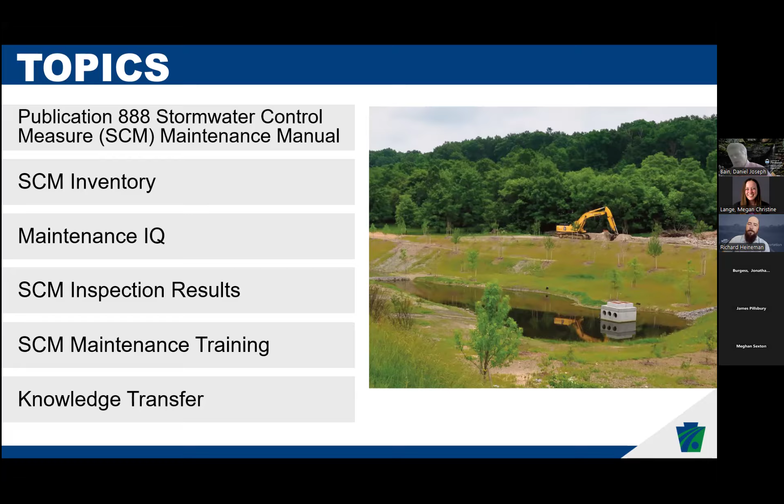So the first thing we started with when I kind of took over the stormwater control measure maintenance program, we have a maintenance manual. Even though it is a maintenance manual, we kind of cover everything in there. We have other manuals, design manuals that tell our designers how to design to meet the permit limits. But even those designers still look at this Pub 888 to kind of see how things should be maintained, how they're going to be maintained so they can design those SCMs properly.

We cover everything from inventorying to our inspections. There's different types of inspections, the maintenance, how to perform maintenance on them. There's common components, how folks schedule and charge those when they're going out doing that maintenance work.

Our SCM inventory, we really didn't have a centralized one here till 2015. If I needed to know information about an SCM or how things were designed, we'd run out to our districts. They had like paper files in a tin shed somewhere. So it was kind of hard for us to get a good understanding of what was going on out in the field.

So we took a major effort here in central office. We actually went through 500 different projects, extracted all that information from the plans, and started creating our inventory. So it took us a little bit to get there, but right now I say our inventory is pretty accurate and rock solid, and we have lots of information in there, which helps us in the long run.

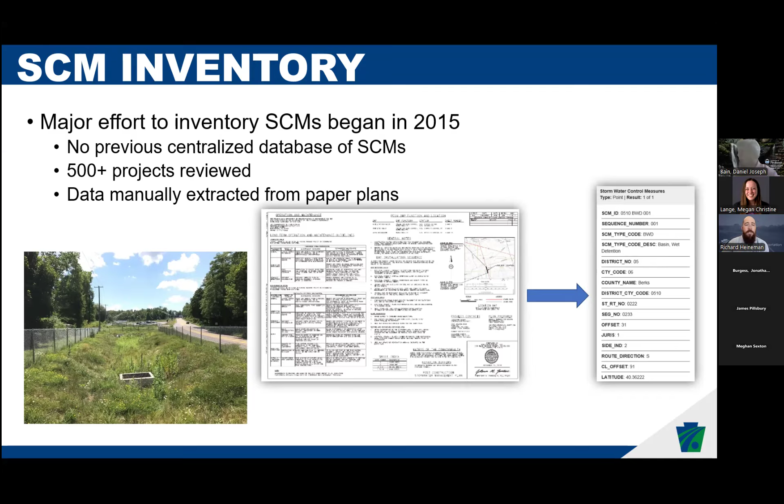In that inventory, it's basically all of our department-owned SCMs. We do sometimes add non-department-owned SCMs if they're right along the roadway, and we get lots of questions like who owns that. Sometimes we'll add them in, but it's just the ones that PennDOT owns and operates and maintains.

We have like 40 plus data fields. Pretty much any data that's associated with that SCM, we capture and keep it in our files in case anyone asks us a question down the road, like how it was designed, what's the drainage area to that, anything that's in that permitting design side. We in maintenance take that and keep that for the life of that SCM.

We in central office review all new stormwater control measures and all that data. So districts will send us that information, and there's about four of us here that review all that data to make sure it's accurate, it makes sense, it's the right type of SCM. We store all those documents associated with those SCMs, all the as-builts, the plans, the permitting, kind of everything in one-stop shop for anyone that needs to know information about that.

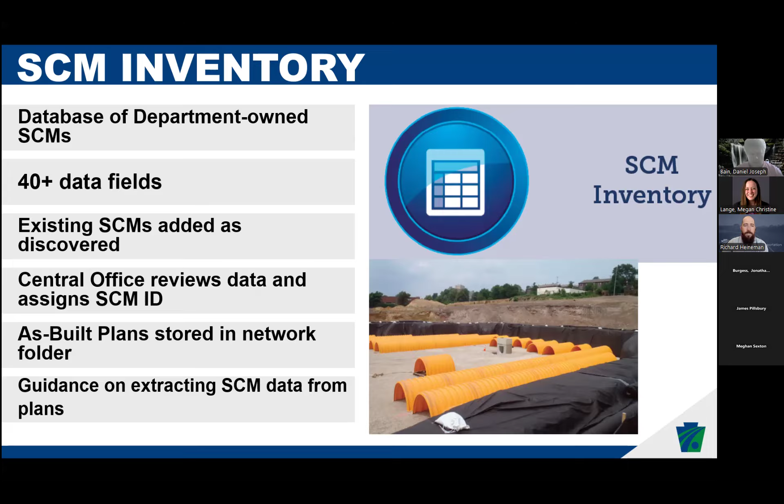So I like to point out here, PennDOT, I always like to tell people we're probably number one, we have the most SCMs in Pennsylvania. Right now, we're up to 4,500 SCMs that PennDOT's responsible for across the state. So we have a lot to do and a lot to maintain, which is good.

We get a lot of data from that, seeing what issues we're seeing after construction, things we have to tweak in design, long-term O&M issues that we see. So we have a pretty big sample size, which helps me look at that, but it's a lot of work for our crews and districts to maintain them.

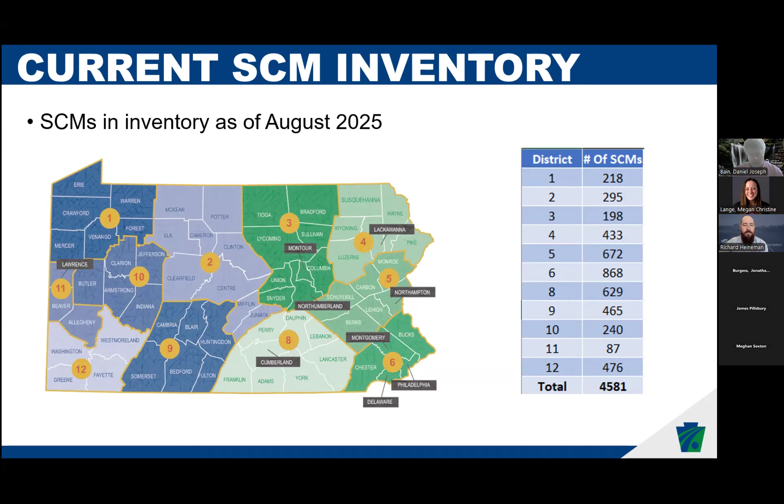I will tell you our SCM growth is tied to our department's program, meaning if we get a lot of money and we're building a lot of new roadways, we get a lot more stormwater control measures added to that inventory.

And like I said, these first couple slides, I'm just trying to give everyone a background where we're at in PennDOT, but our centralized database, we store all that information in what we call our Maintenance IQ. It's a custom GIS application for PennDOT, which houses all that. Anyone in PennDOT can see that information. They just have to click on that dot. It gives you anything you need to know about that. It has inventory data, inspection data, all of that information.

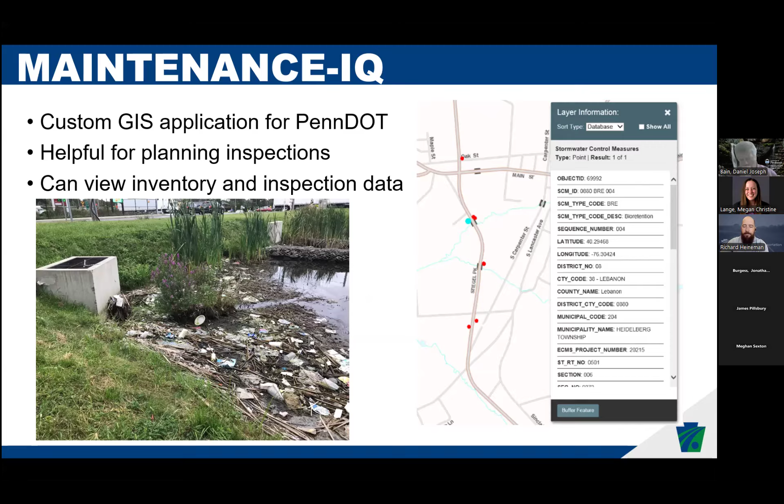So to get all that information, we have two different types of inspections that we do here at PennDOT. So on a 3-year cycle, we do visual screening inspections. To do those inspections, we require folks to take a 1.5-day training. It's required to do those.

It's a lot of information, but I always tell folks the VSI, you really don't even need a plan to go out and do that to inspect those. We're looking to make sure it's still functioning, like we don't have a lot of erosion, too much vegetation, structural issues. It's just that high level inspection that we do once every 3 years.

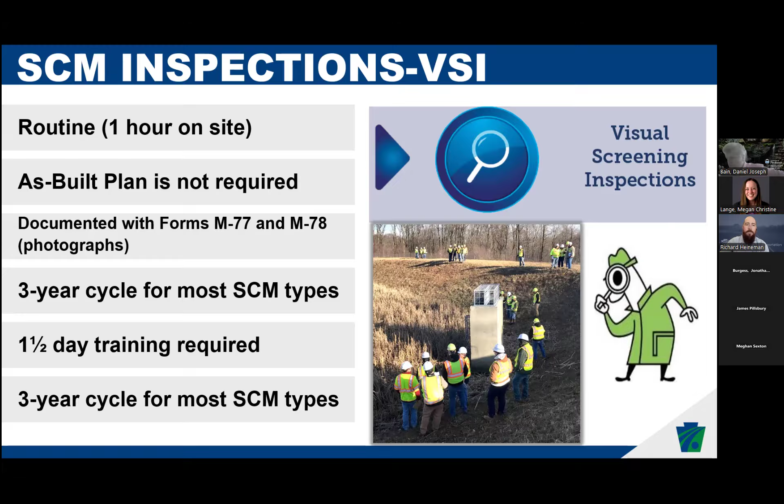The other inspection we do is a condition assessment. We do that 1 year after construction. The reason is we feel that an SCM 1 year after construction is pretty much settled in. We're not going to see a lot more issues. And then every 10 years after that, typically that's an engineer or environmental professional doing that analysis.

It's very detailed, it's like 2 to 4 hours on site, depending on the size. They're confirming that it's still built per the as-built plan. It's still functioning properly. That also requires a 1.5-day training, so those folks have to go through that to do those inspections.

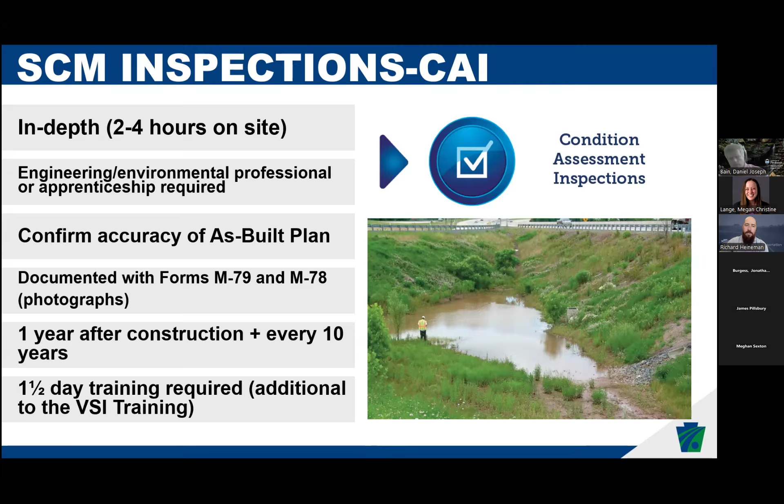So kind of getting to now what Dan said I was going to talk about, to understand what we need to look at in design and change some of those designs. We took a lot of that inspection data, seeing some of those issues we have. So we have SCMs that have been out there 10 to 15 years. We have ones that have been out there 2 years. So we looked at over 5,600 different visual screening inspections.

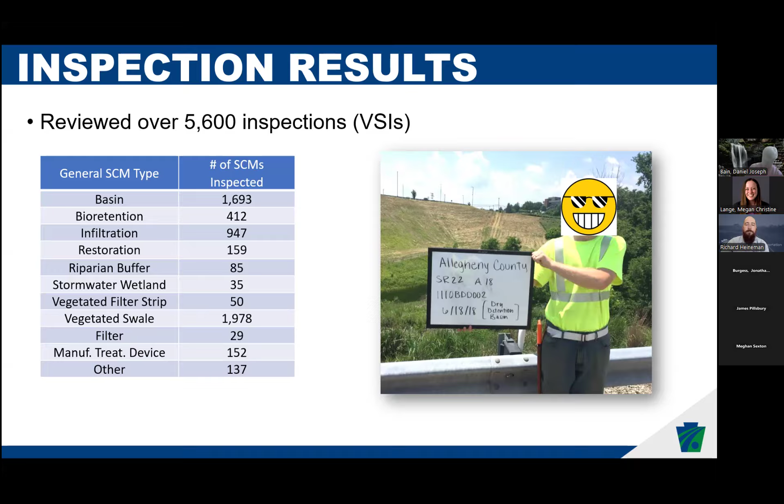So to tie that into design, when we talk to folks when we're doing design, whether it's a forebay or some way to start, I don't want to say capturing the trash and debris, but limiting the area of that trash and debris that goes throughout the SCM. So when our crews go out there and have to pick up that trash, they're not having to go through this large SCM where it's spread out evenly. So some of those forebay designs come into play. I have some slides and examples later on.

Erosion, we see a lot of. So that SCM bottom and side slopes, we see a lot of side slopes where we'll see erosion. So making sure when we're looking at that design, not having those side slopes so steep, trying to tuck them in there, or making sure we have the right vegetation, or if we have to, does it have to be rocked or riprapped, so we don't see that accelerated erosion. So trying to focus on that in the designs, so then our crews later on don't have to go back and fix that 2 to 3 years after it's been up and running.

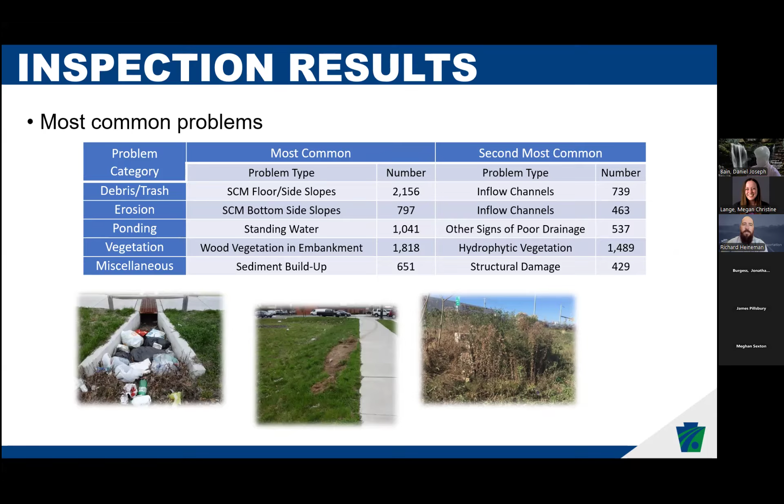I don't have all the answers to that, but we're trying to look at that. If it's just barely infiltrating into design parameters when you're looking at it, it's probably not going to get any better 2 to 3 years later on. So those are the big ones; we took these inspection results and looked at that overall, looking at the different types of SCMs. So I just lump basins all together.

We see every type of problem category across, but the most engineering evaluations that we had to do is standing water in dry basins. So we have to go back and look. It was like 240 some basins that aren't supposed to have standing water, but they do now. So that's probably going to change. So some of the things we're looking at, and some of this is a regulatory driver, is during construction now, DEP is going to start requiring confirmation infiltration testing.

So after December 8th of this year, in our construction projects and all projects, if you're saying it's supposed to infiltrate, we're going to be checking that infiltration rate after it's completed in construction before we hand it over to maintenance.

The other thing too, in our bioretention, looking at that right type of vegetation, what are we putting out there? Is it easy for us to maintain? Do we mow it? Do we not mow it? Can we get into that? I have some slides later on to talk about specific examples of that.

And then, like I said earlier, infiltration—you probably hear me say this a lot. That's kind of where we see the most issues, putting infiltration basins where that infiltration was probably right at that limit or level to meet the DEP requirements for an infiltration basin.

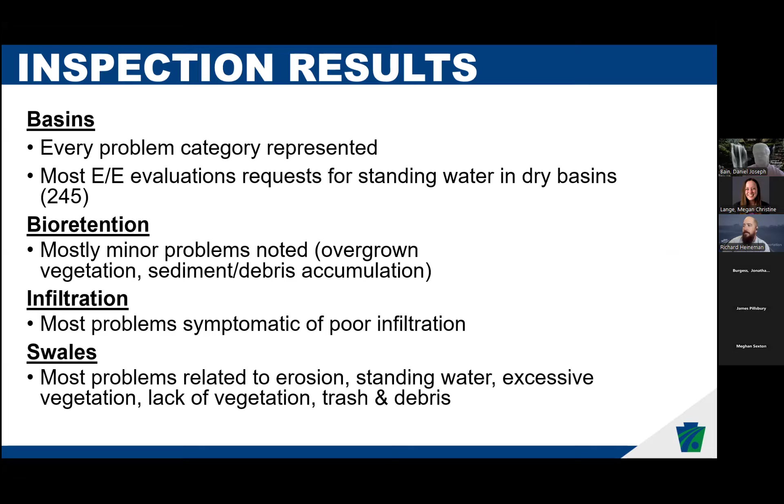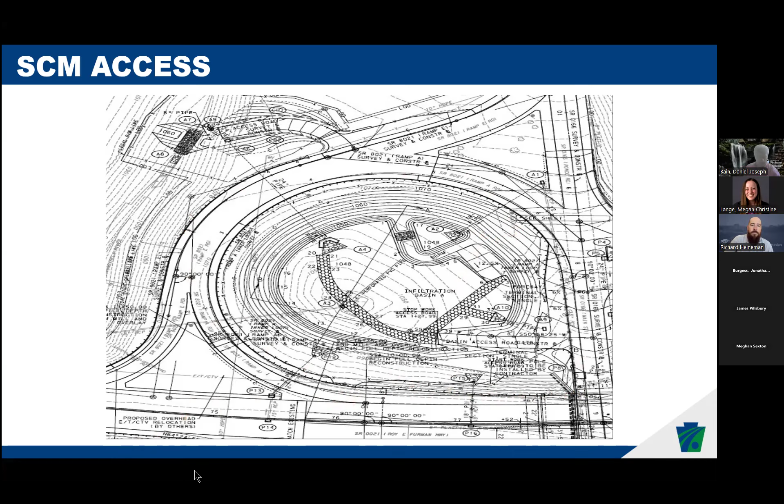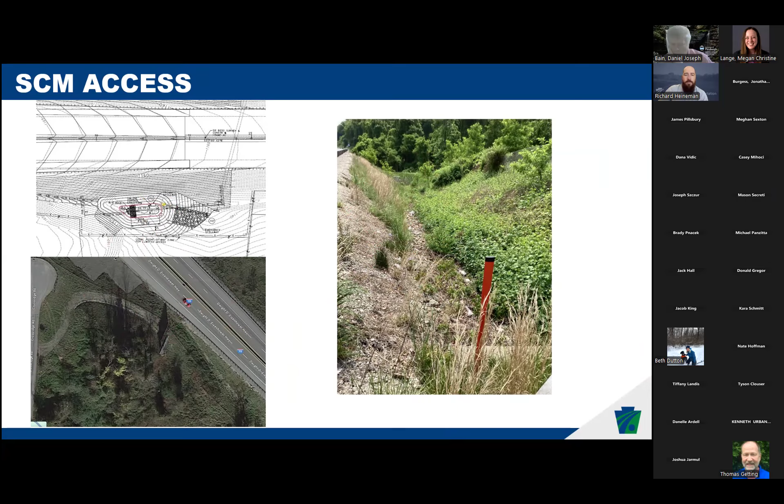So it's just one of the things we've had issues with—getting into our SCMs is a big thing. And this is another one, and I've taken these from different districts. A lot has to do with access roads.

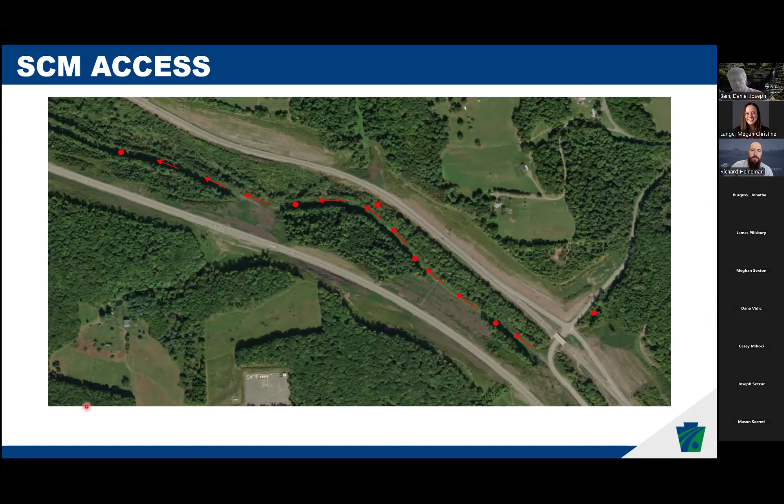And that can get costly depending on what type of soil mixture is needed to promote that infiltration. So it's kind of a larger issue we're trying to figure out.

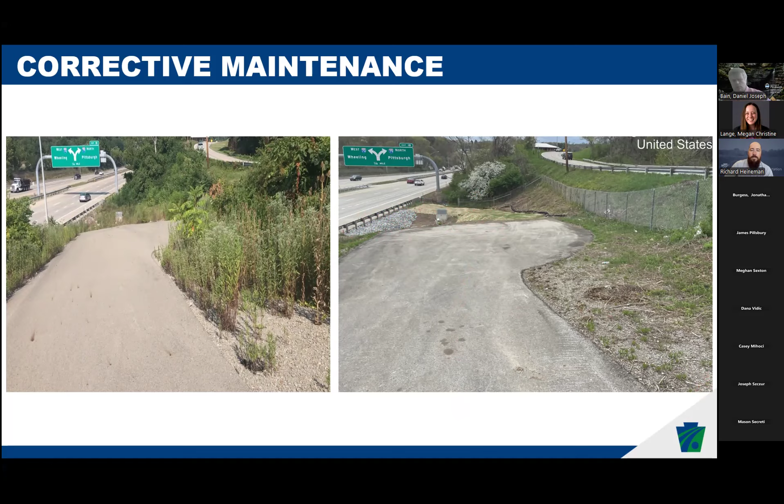And this is just a similar picture of that same basin before - the pre and post of that same basin I was talking about prior.

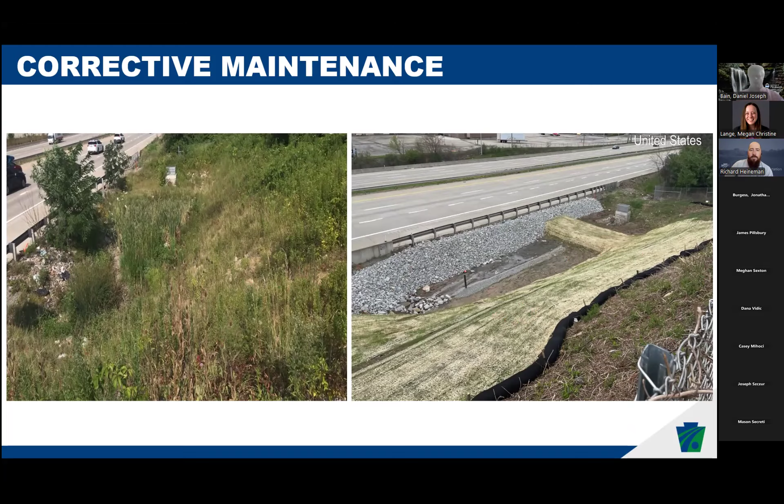Here's another one where we had to do a lot - it was supposed to be a dry detention basin. Pictures to the left. You can see here it was holding water.

We did another large corrective maintenance project. We built it back to per plans. The contractor did take care of our vegetation there, replaced that filter strip here in the middle, and installed an under drain to help with that infiltration.

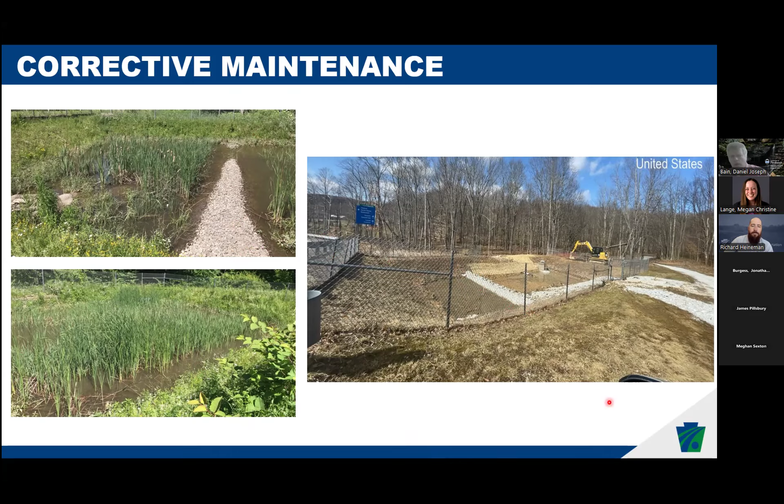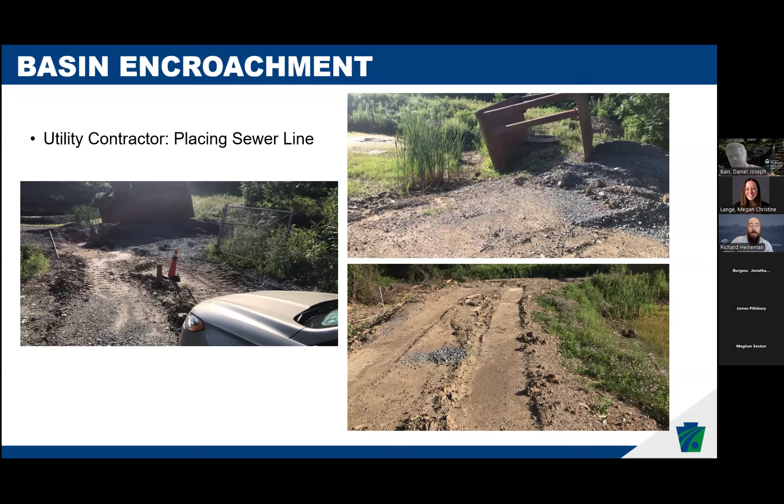I just put this one in - it's not always construction projects. We actually had a project where we had an existing SCM where a sewer contractor went through and plowed through our SCM, so we had to have them rebuild it. I'd like to point this out, even though they're built and already there, keeping that inspection cycle is important because they just didn't think they had to worry about it, so they went through and destroyed our whole SCM. We made the contractor put it back to acceptable condition, but it's just a shock thing you don't always think about - having to worry about utilities going through existing SCMs.

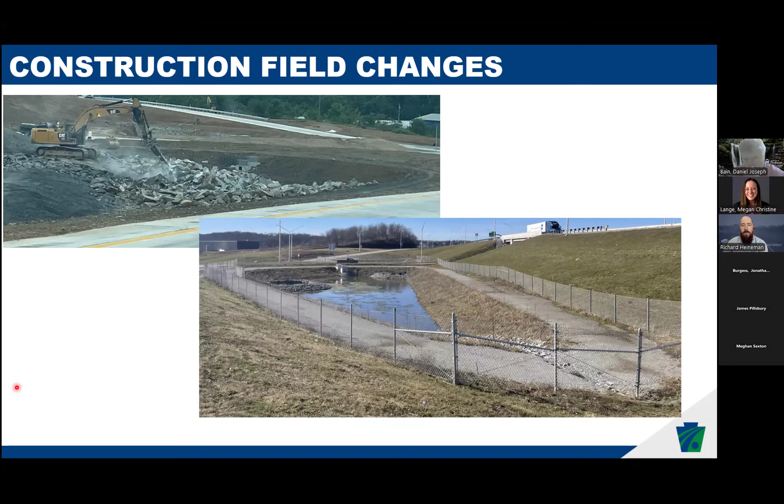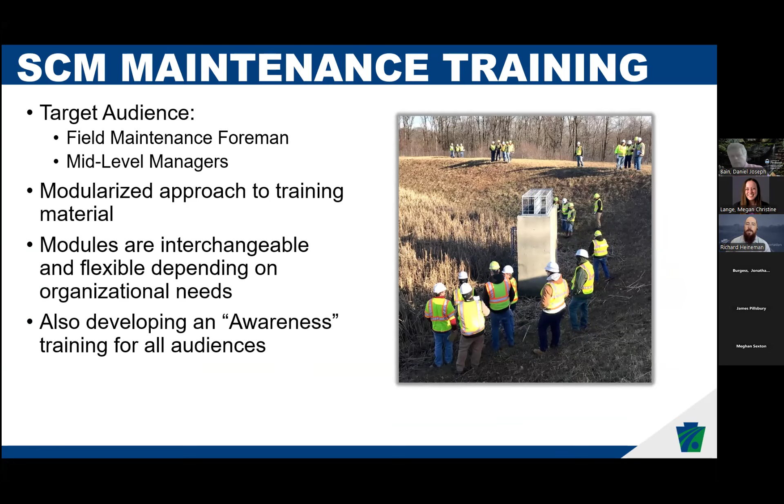So that's kind of all my design construction issues. I do want to tie into our SCM maintenance, which our crews out in the field - we have over, I think, 7,000 employees at PennDOT on maintenance crews. Training them to know what to look for and how to maintain the SCMs helps us because they have a lot more eyes out there. If they see something wrong, they can bring it to our attention and we can fix that. This is just my plug.

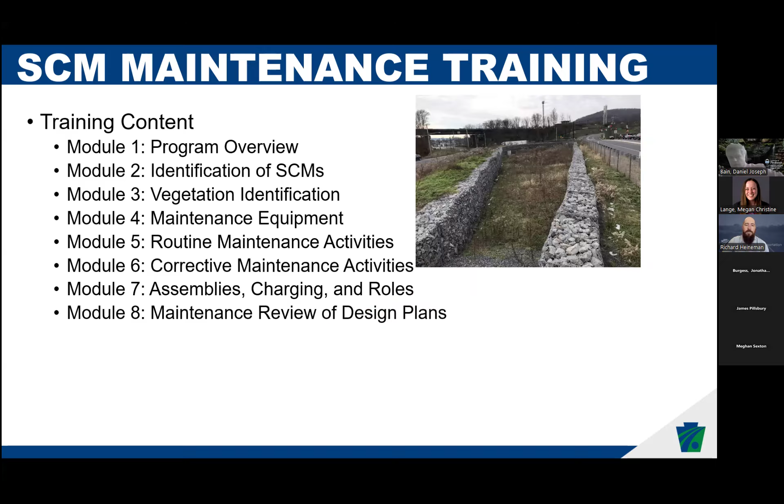Our maintenance training is 8 modules. We tell all of our maintenance folks how to identify SCMs, type of equipment, how to do the routine maintenance activities. And then that knowledge transfer is kind of key.

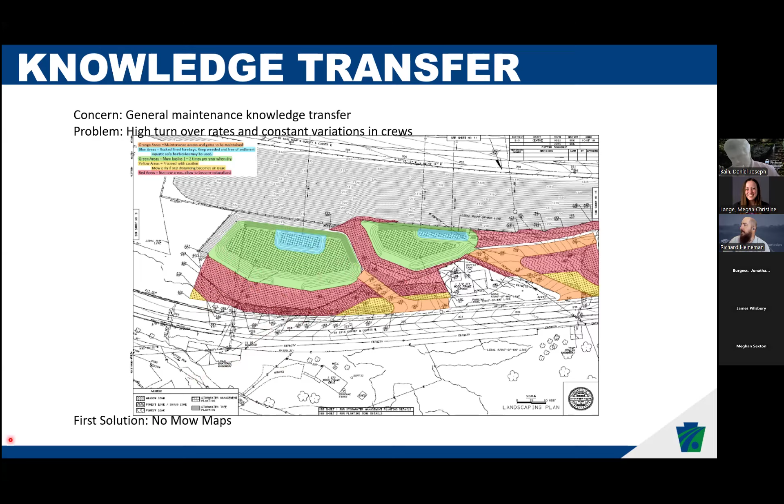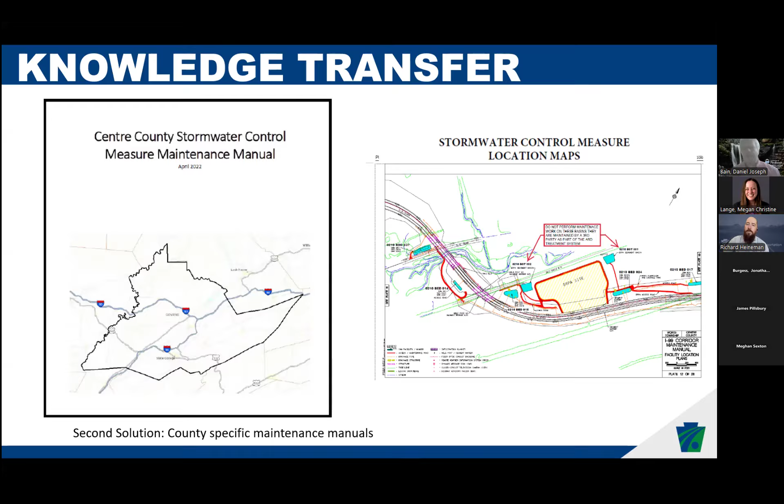So that kind of wraps everything up on my end for my presentation.

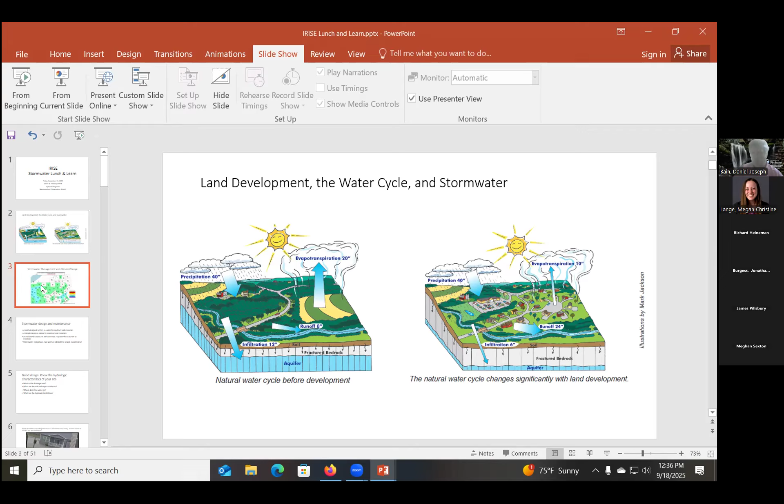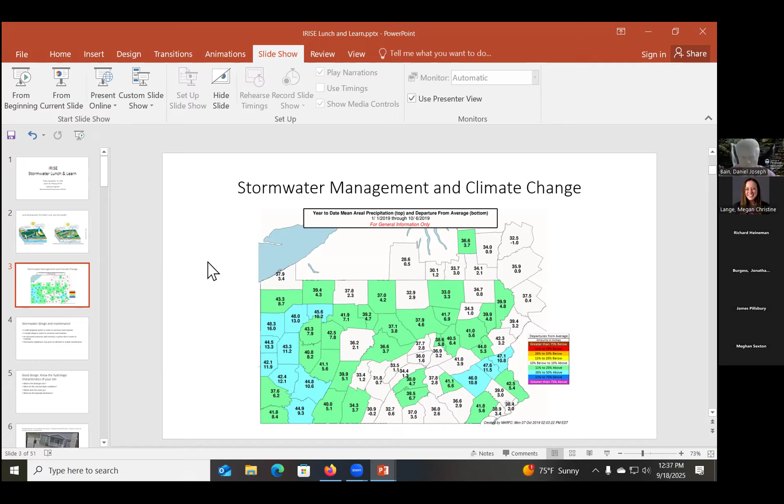This map here, can folks see this map of the state? This map shows from a couple of years ago when we had excessive rain. In southwestern Pennsylvania, the Corps of Engineers has said that in the Ohio River Basin, they expect over the next 50 years that rainfall will increase and the intensity of rainfall will increase. So as you design for maintenance, you have to design stormwater to handle a larger, faster storm than what has happened previously.

You have to step back from your design. You have to look at that design and say, okay, is there a way I can make this simpler? Is there a way that I can make this easier? Because maintenance is not being done by the engineer who designed it. It's being done by someone else, and the person who's doing it may not understand all of the aspects of stormwater management very well.

So, well-designed system, a simple design. Engineers especially—when I was in college years ago, I had all kinds of classes, but I never had a class on how to run a bulldozer. So you get an engineer who designs a ditch that's supposed to be 1.327 feet deep, and the guy in the field is building this ditch with a 30-ton machine with a blade 10 feet wide.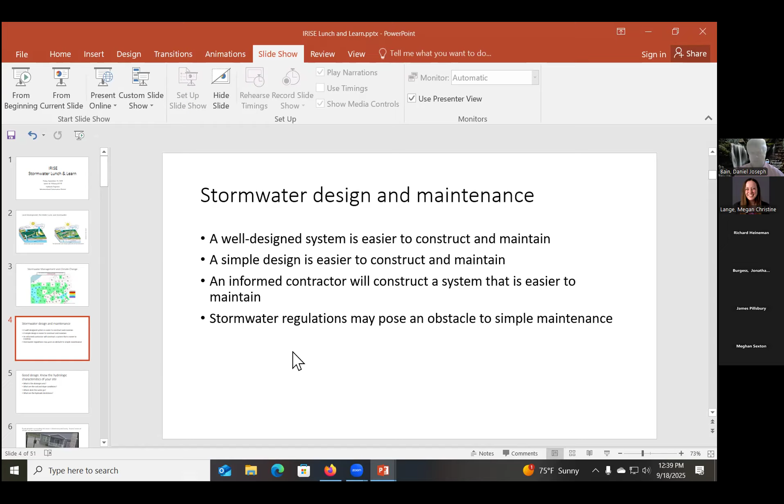Then, of course, the last bullet point here is on regulations. We deal a lot with DEP, the Department of Environmental Protection, and stormwater regulations. We'll talk more about that later, but some of the regulations may pose an obstacle to maintenance.

So this slide here: know the hydrologic characteristics of your site. What is the drainage area? What are the soil and slope characteristics? Where does the water go?

One of the slides that Rich showed was busting out rock to build a detention pond. Perhaps someone didn't have access to borings or testing, and they thought, well, put this pond here and it will infiltrate. But if they would have had some tests available to them, they would have had a different situation.

This is a house that we looked at. This is not a highway project—this is about a $350,000 house in a municipality in our county. Earlier this year, we had some very heavy rainstorms come through that produced quite a bit of rain in a very short time, in a very narrow band, maybe 4 or 5 inches of rain in just a few hours, but in a very, very narrow band.

This house here was surrounded on 2 sides by several inches, almost a foot of water. If we look at the next picture, we will see the water came up against the foundation of the house. They built the house fairly well—it had excellent foundation drainage. That excellent foundation drainage carried that water, which was several inches deep, down along the foundation.

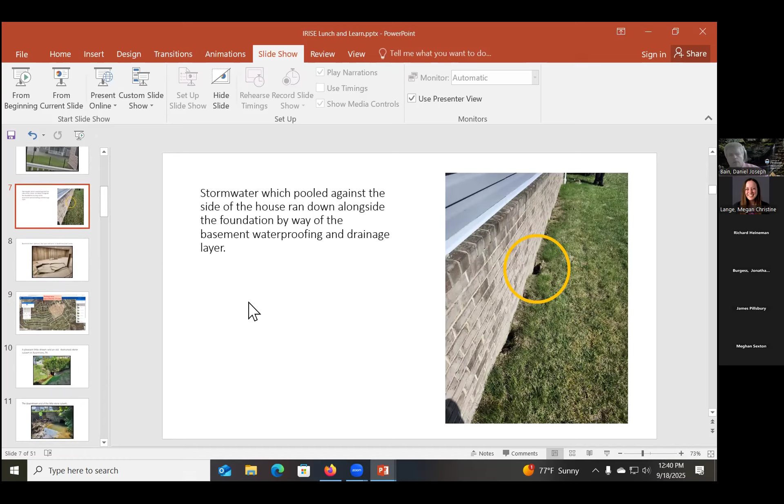So the water then was introduced under the basement floor, and this was the result: a house that was only 4 years old had well over $100,000 of damage because of this water coming up against the side of the house. Why did the water come up against the side of the house?

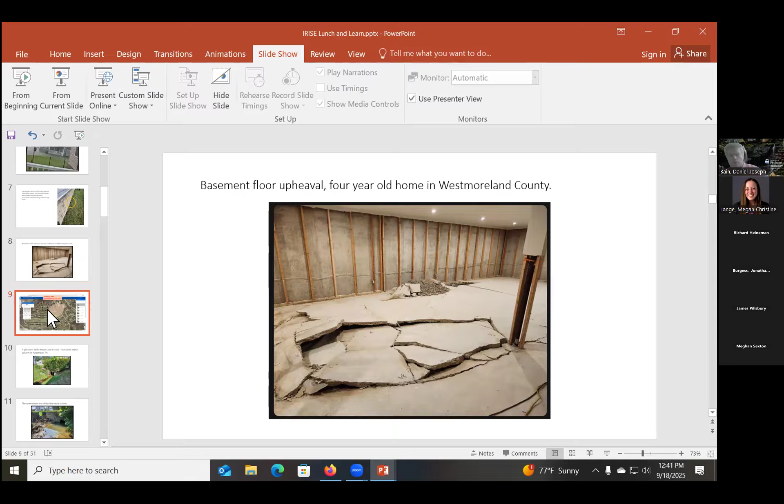Well, we went out and looked. We looked at our county's tax map system—if you have a tax mapping system in your county, make use of it. Ours has contours available, and ours has all sorts of things.

Well, the drainage area in that storm of water running to that house was 23 acres of land. So if you got 4 inches of water over 23 acres of land in the period of an hour or two, no wonder the house had this damage. And so the person who designed the house obviously wasn't paying attention to what was going on around the side of the house, and that happens with stormwater management as well.

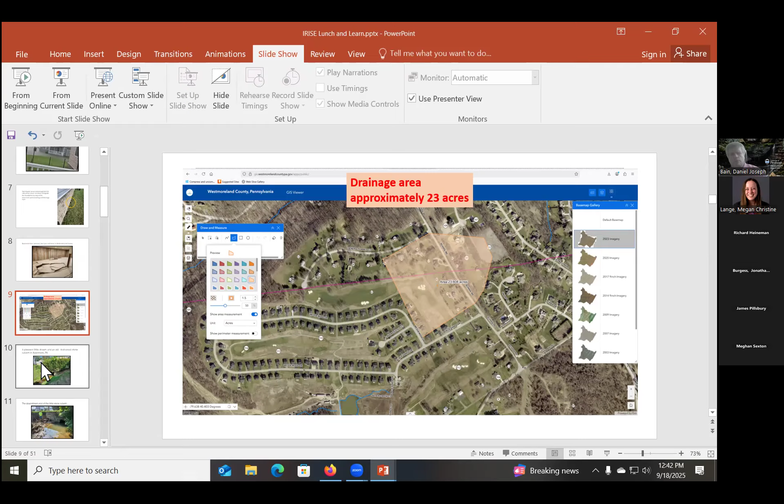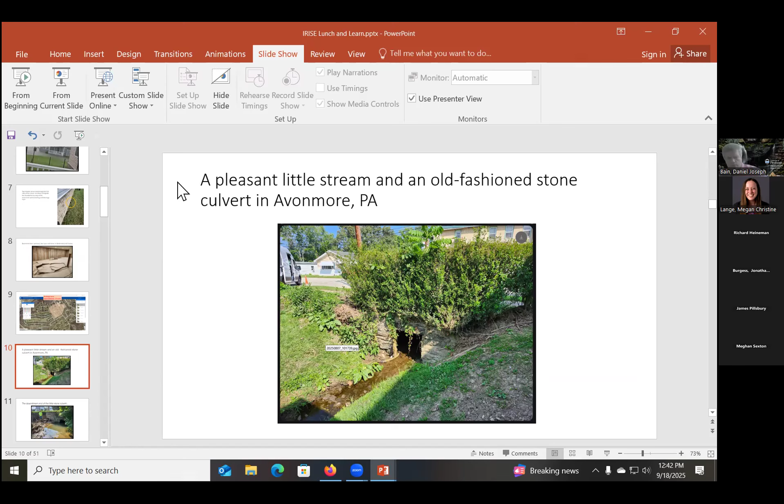Here's a culvert in the little town of Avonmore. Now, Avonmore is one of those places where the mill has closed and everything's kind of trickling away in a sense. So here you have this cute little culvert, maybe 3 feet square or so, maybe slightly larger. And so this is the downstream end of the culvert.

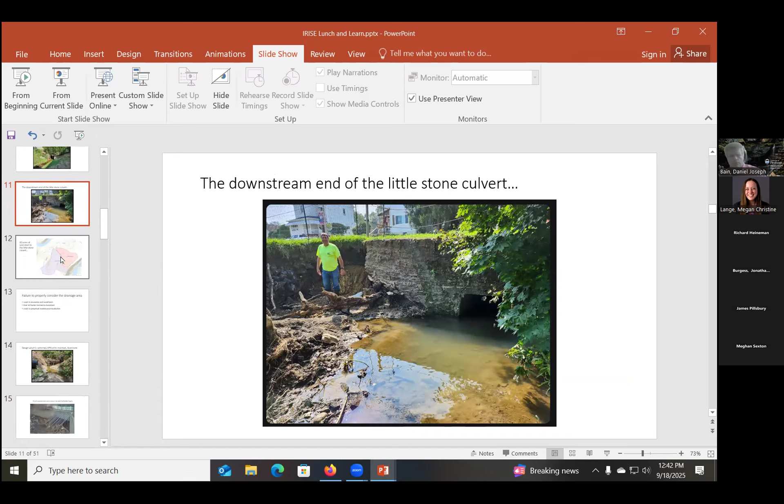They had several inches of rain. It was the same storm. And that storm dropped several inches of rain, and so the water couldn't go through the culvert. Culvert was too small. Water came pouring over the top. And once again, whoever designed that culvert, and the thing's probably 100 years old, there's 90 acres of drainage tributary to that culvert. And so really, when we think of maintenance, we've got to look around.

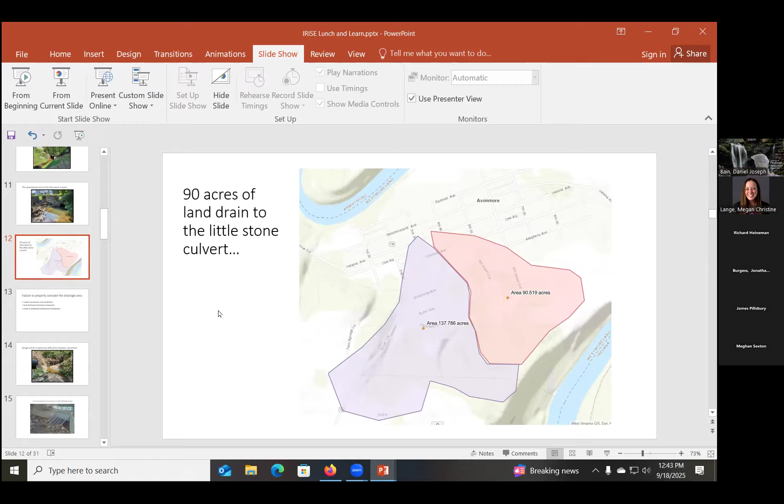You have to stand where you're at and look around. Are there houses? Are there trees? Is there a farm field? Is there a shopping center? What's going on around me? And so that's very, very important.

There were 30 houses in Avonmore that had damage, water in the basements of 30 different homes. These are people who do not have much money. They are people who have lived in the house maybe a long, long time, and maybe they're on a pension or fixed income or something. And so the failure to consider what was around led to that.

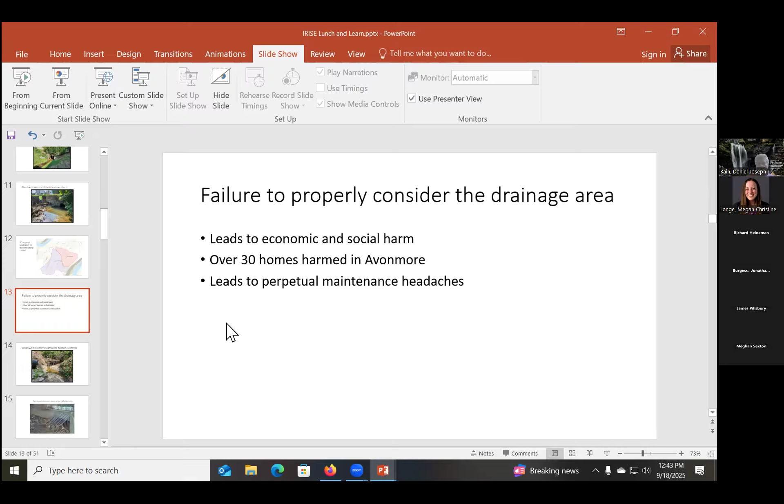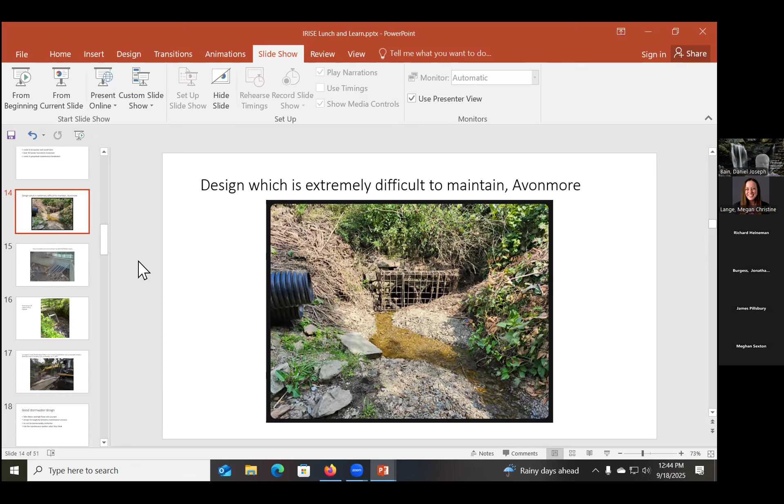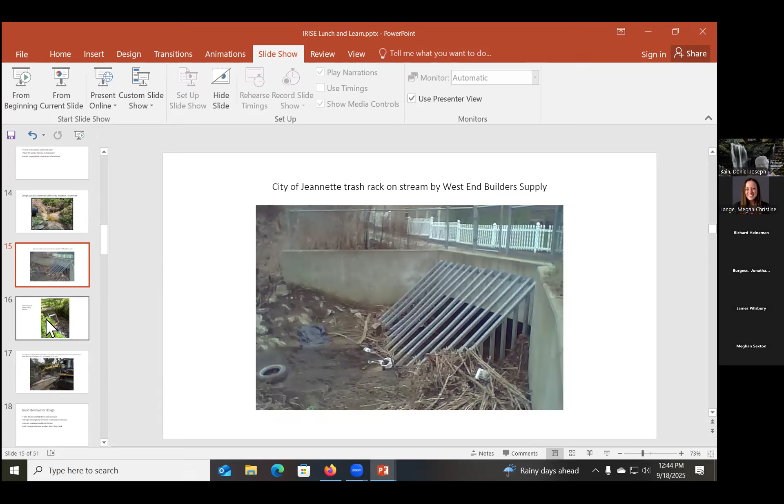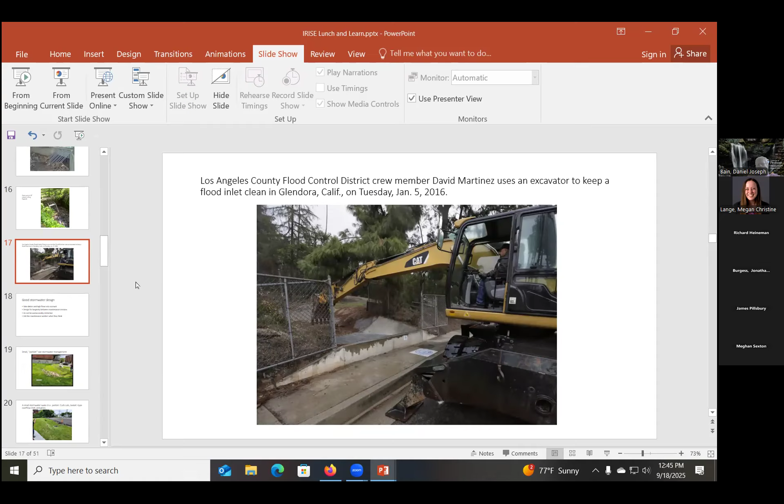Okay, so this is where you want to communicate with the equipment operators, communicate with the people who are in charge of the maintenance. And sometimes I think that's probably the weak link in this chain, is that someone doesn't communicate with the person who's doing the maintenance.

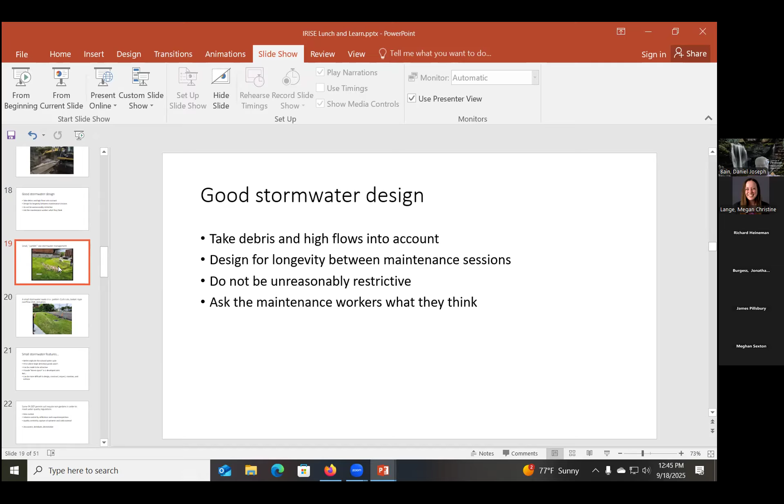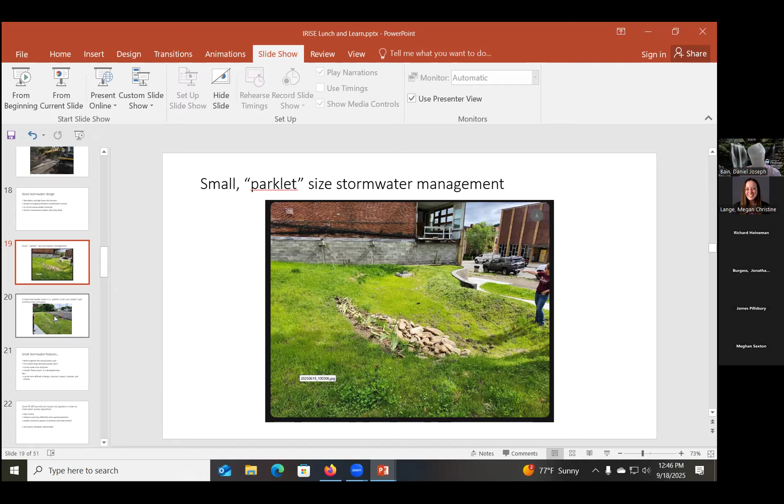Now, small stormwater features are really something that DEP is looking at, and they want municipalities, they want developers, they want landowners to do this. Small features replicate the water cycle better. You try to spread that out. Small features will fit in. In an urban area, they provide a little oasis, a green area, but they'll add a level of difficulty.

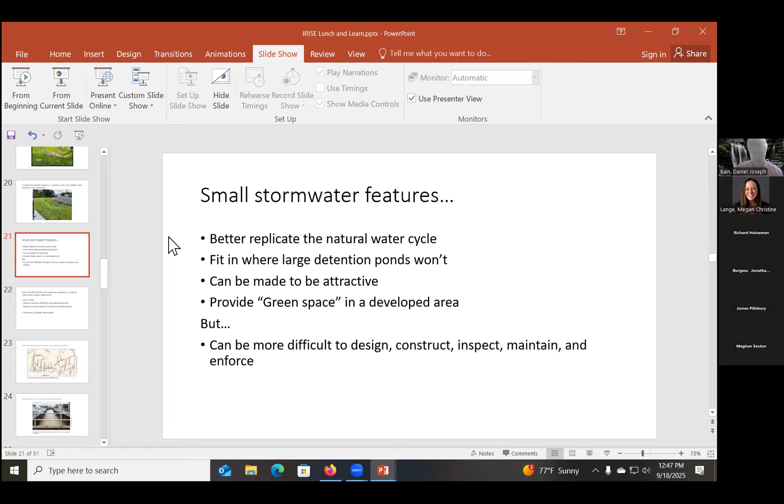And speaking as somebody who's been to lots of sites over the years, it's far easier to inspect one detention pond than 10 rain gardens. And so you have this battle back and forth. What are you going to do for stormwater management? Now, DEP likes you to think about these three things: rate control, volume control, and water quality.

And so Rich had a photo there of all kinds of trash building up in a detention basin, and that is sure a problem. And now we think about microplastics. When plastic trash gets into the system, it breaks down, of course. And so we need to try to trap that. We need to try to capture that. And the words that DEP likes to use: disconnect, distribute, and decentralize. And so that is something that they look at.

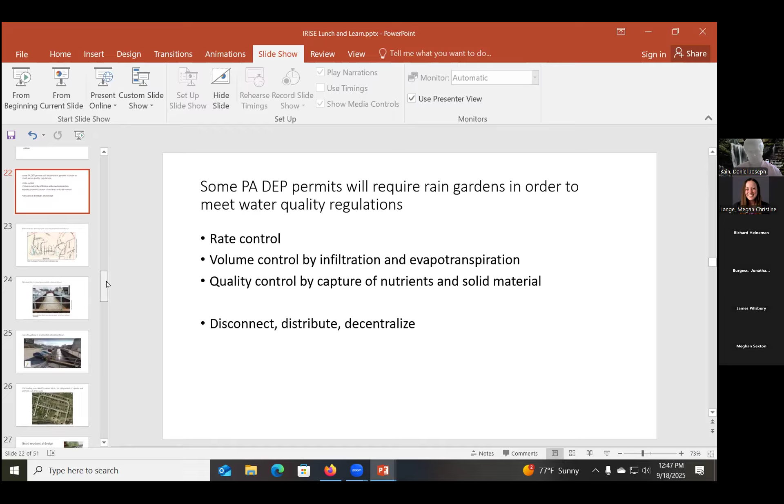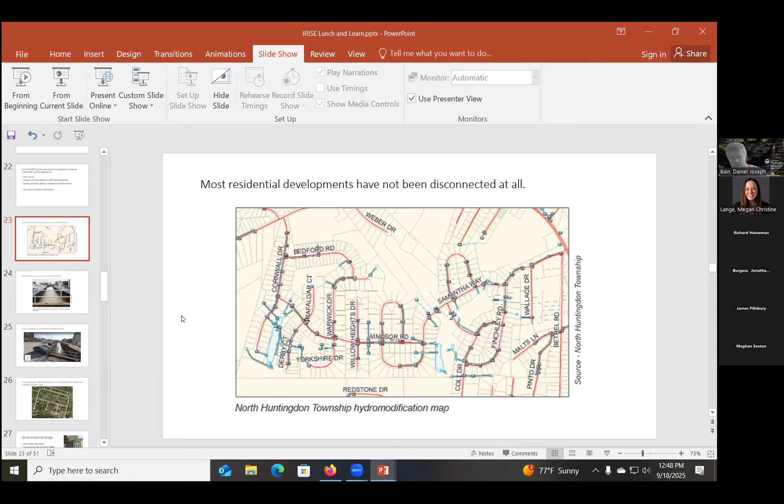Water falls on the roof of a house. It runs down the roof to the gutter, down the gutter to the downspout, down the downspout onto the driveway. The water goes on the driveway into the street. It runs down the street into the catch basin. It runs through a pipe, and it never has an opportunity to be interrupted or delayed or stopped in some way. And so that is a problem of some land development, that there is this connection and the water is never disconnected.

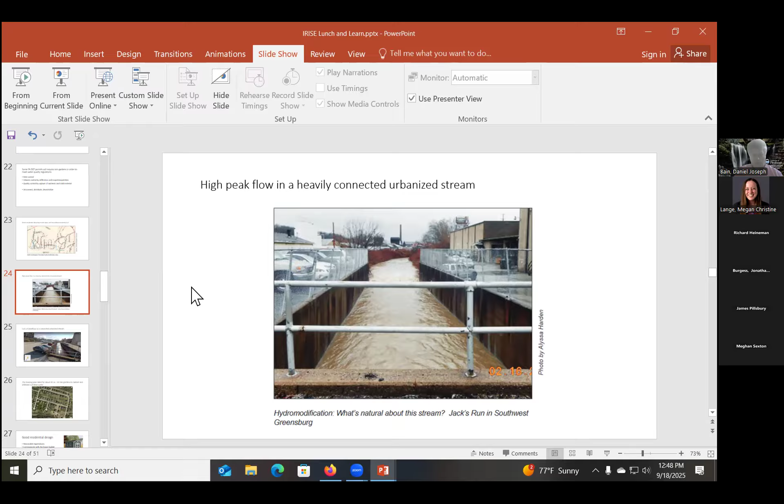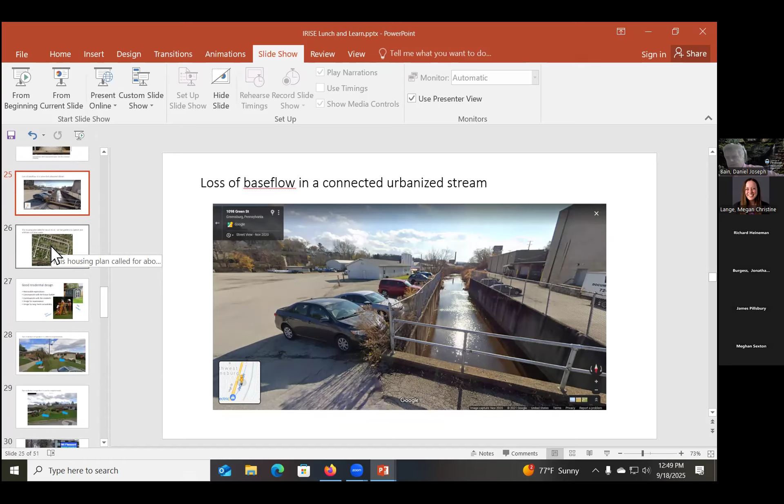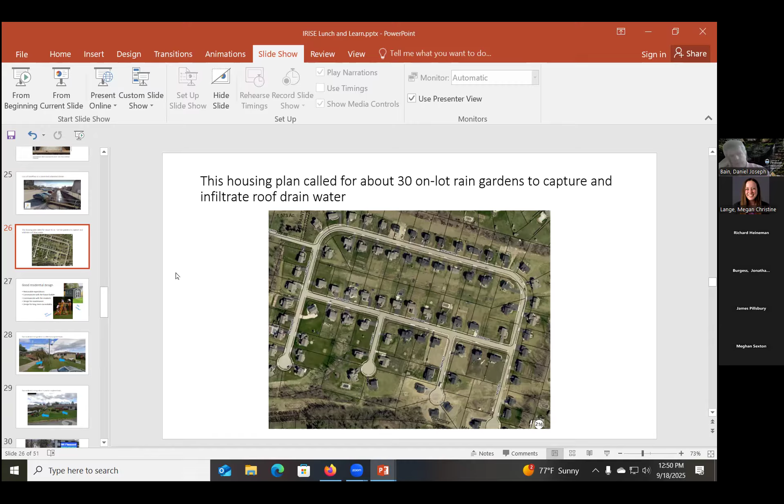A whole bunch of them, the developer had never connected the roof drains to them. A whole bunch of them were built on a slope, mimicking the slope in the backyard. In other words, they weren't flat, they were sloped, so they would never hold water. And then a whole bunch of them ended up with children's play sets and garden sheds, and so they never got the opportunity to be used the way they were intended.

So then we and the township were forced to go back and try to get all of these homeowners to put this back in their yard right. And of course, the first thing that anyone ever does when someone tells them to do something like that is they say, well, I'm going to call my lawyer. So that was not successful.

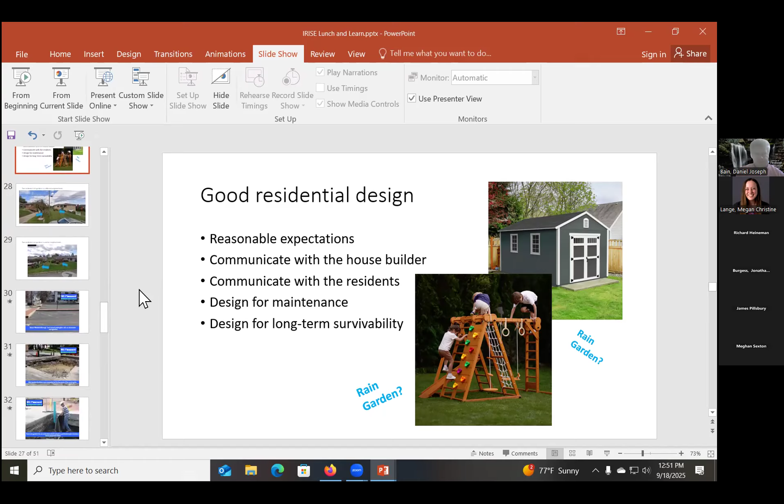So really, the next step of maintenance, when you're thinking about maintenance, you've got to communicate. You've got to communicate with the owner, with the developer. You've got to communicate with the municipality. Maintenance and communication go hand in hand. These rain gardens in the backyards had never been placed in any kind of an easement, so the municipality did not have the right to go in and tear down anyone's play set or garden shed.

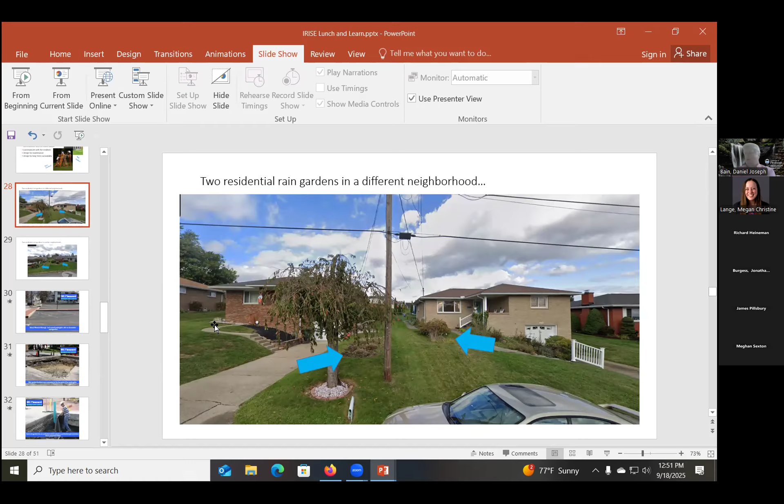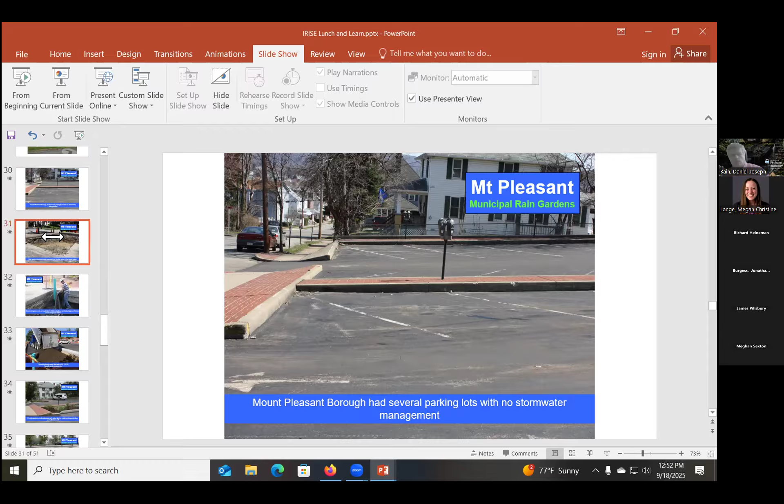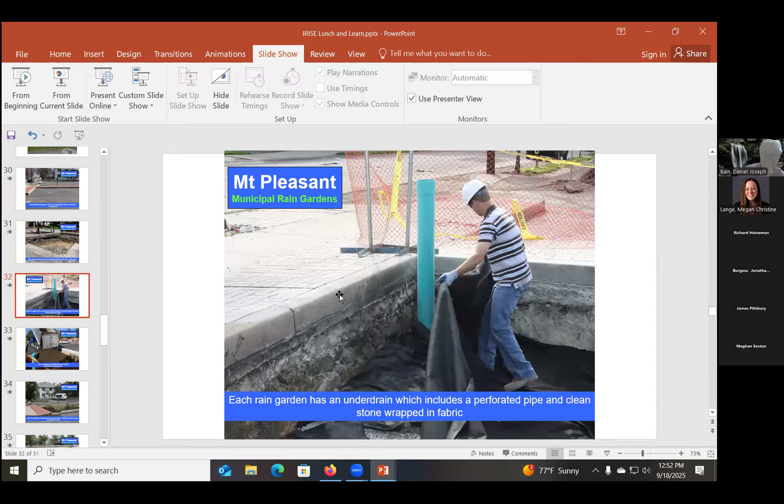We had a grant. We excavated out about 6 parking spaces out of the 35 or 40 or so that were in this lot. We dug down. We placed an underdrain. We placed fabric and stone. We placed a soil mix. Now, this mix is a mixture of topsoil, sand, and compost. It was manufactured, not mixed on the site.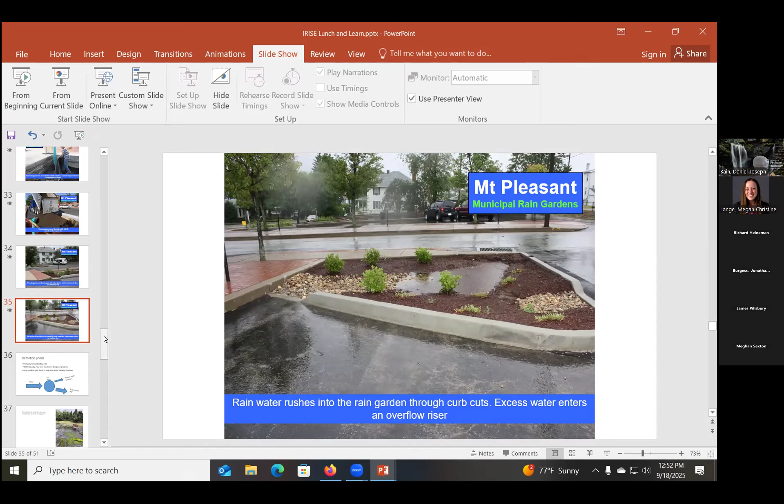Here's something else that DEP is pushing, and DEP is pushing the use of flow splitters. Now, if we think about the rain that we receive here, most of our rainstorms are less than an inch of water. And even with climate change, most of our rainstorms still will be the smaller storms. And DEP's regulations require you to treat water quality for the smaller storms, not for the larger storms. And so larger storms are controlled for rate and things like that. But the smaller storm, the 2-year storm, for example, is what they recommend.

And so you will need to use what's called a flow splitter. A flow splitter is a manhole or an inlet or something that has a means of diverting the low flows to a water quality treatment device and the higher flows to the rate control practice. So this is something to keep in mind. DEP is going to be looking for this.

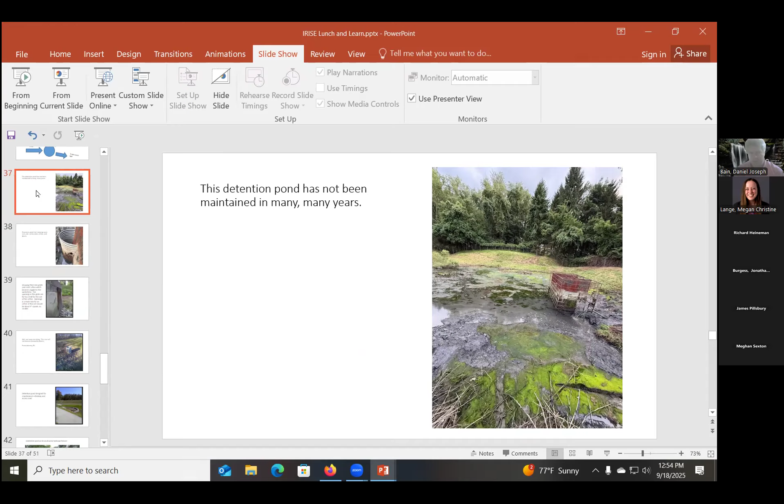Here's another detention pond we looked at fairly recently. No maintenance in many years. It had developed a permanent pool. There's about 4 feet of mud in there. This is what the riser looked like after they'd pumped it down. And so maintenance needs to be done on an ongoing basis all the time. You need to maintain a pond every year, if not twice a year, 3 times a year. If you let it go, it becomes a huge problem, as you can see through this situation here. If they would have maintained that steadily all along, it would have been a different story.

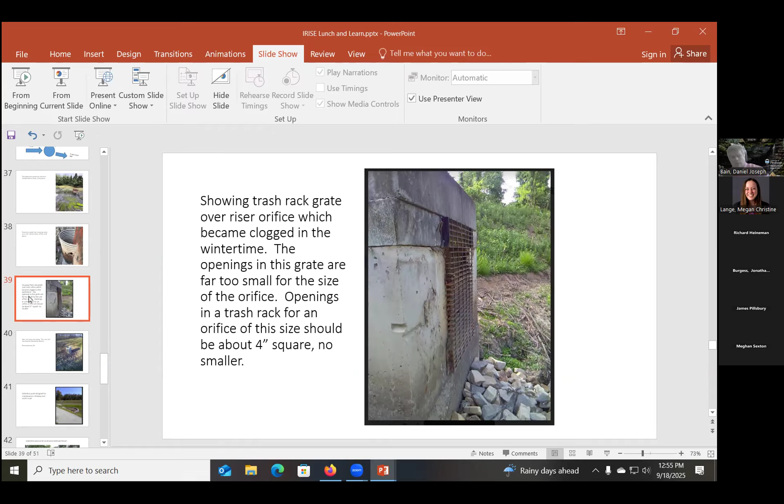Here's a bad design of a trash rack. Now, the pond outlet of this pond here was a 15-inch pipe. The orifices on the front of this basin here were a slot about 18 inches wide and 6 inches high. There was another hole near the bottom with about a 6-inch hole. So the guy had a bit of walkway grating or something like you'd find in a factory, and he had his employees screw that to the front of the box. Well, that clogged up with blades of grass and leaves, and so the whole thing filled up with water and wouldn't drain out. And so maintenance was affected then by this guy's poor choice of a trash rack.

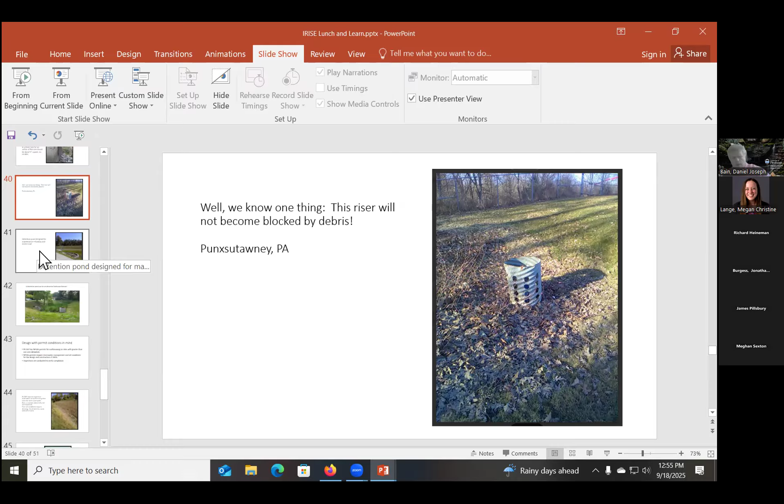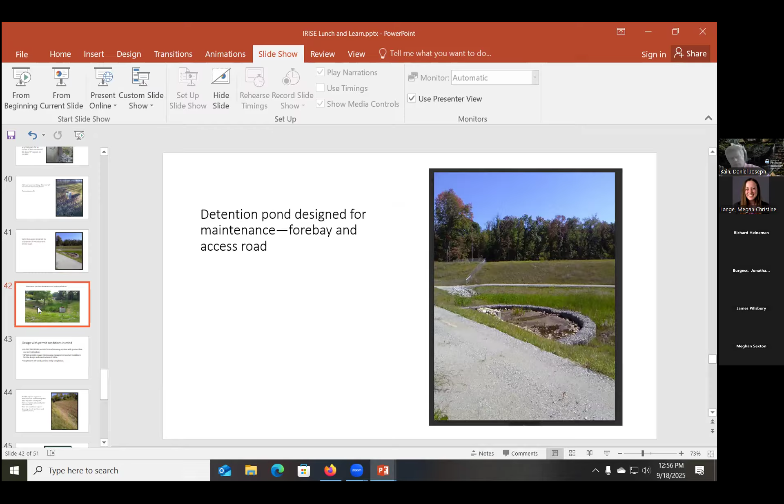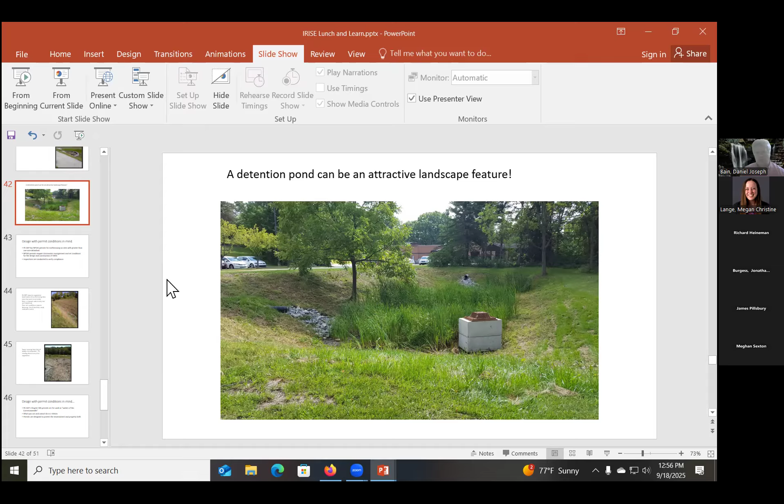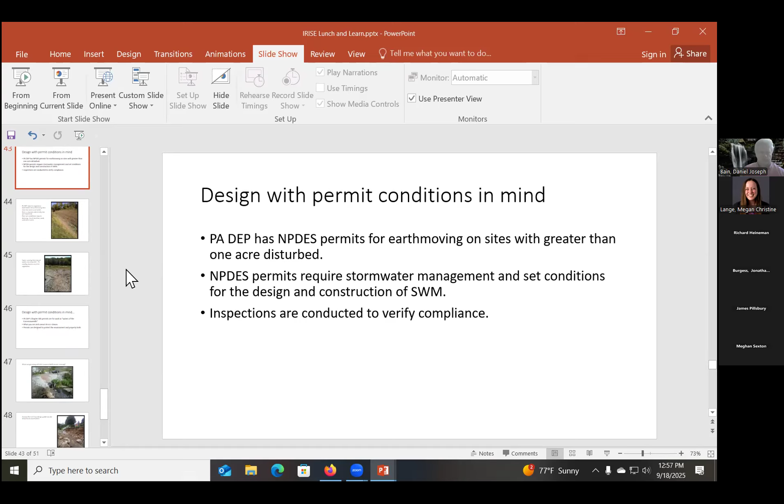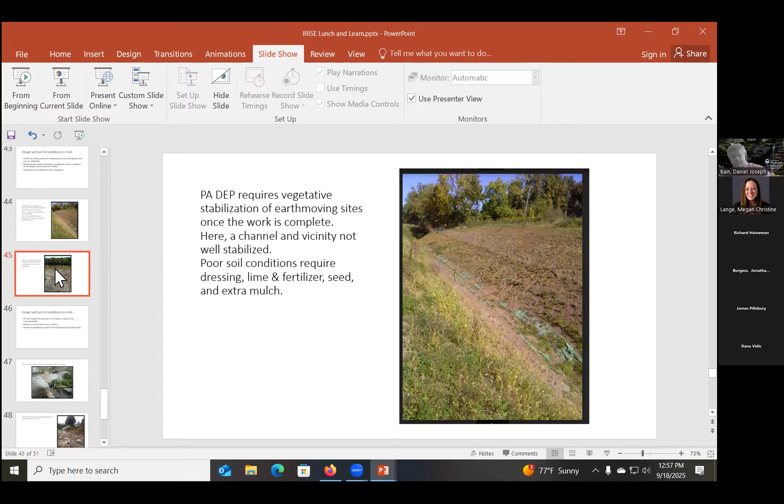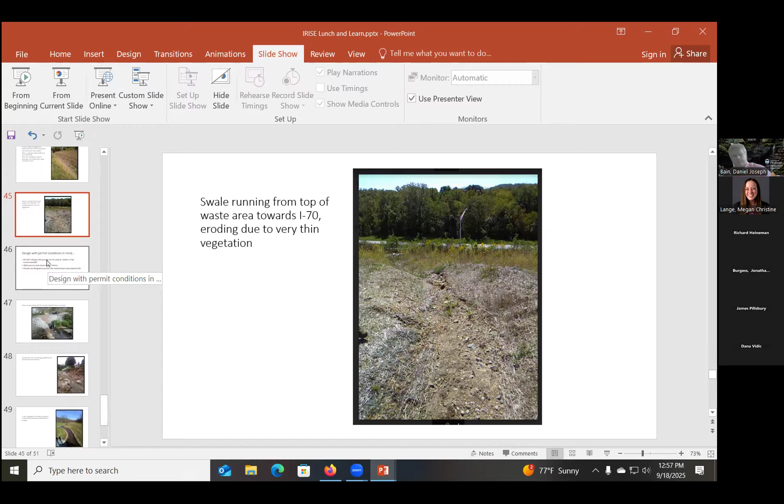Here's the contractor waste area. And once again, they did not establish vegetation. They didn't do that properly. And so they had a ditch. They had the ditch lined, but the water coming off overloaded the ditch because there wasn't very good vegetation, and the ditch began to blow out. So vegetation is so very, very important when you're thinking of maintenance, and you've just got to maintain your vegetation. Lime is the key. A lot of our soils have rather a low pH.

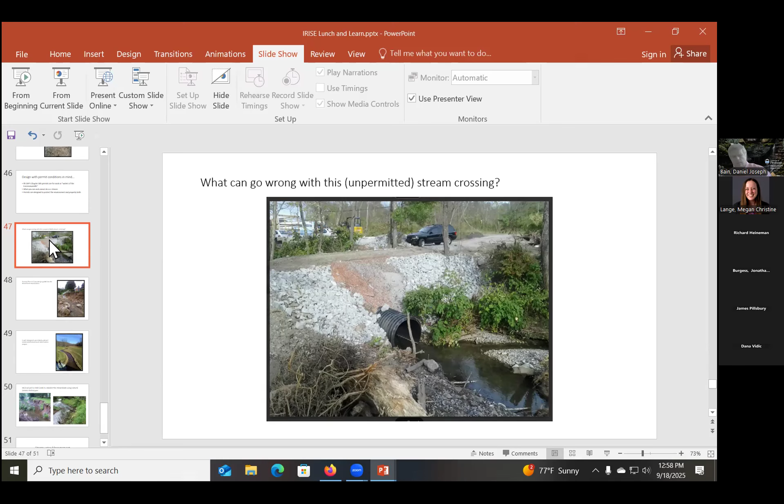Chapter 105, we'll just go into this a little bit because sometimes stormwater intersects with DEP's Chapter 105 regulations. This culvert here was not permitted. Notice the sides are kind of sliding in there. It's just a bunch of junky fill they dumped. And so really you've got to be in the field. Engineers, designers have to be in the field while the construction is taking place.

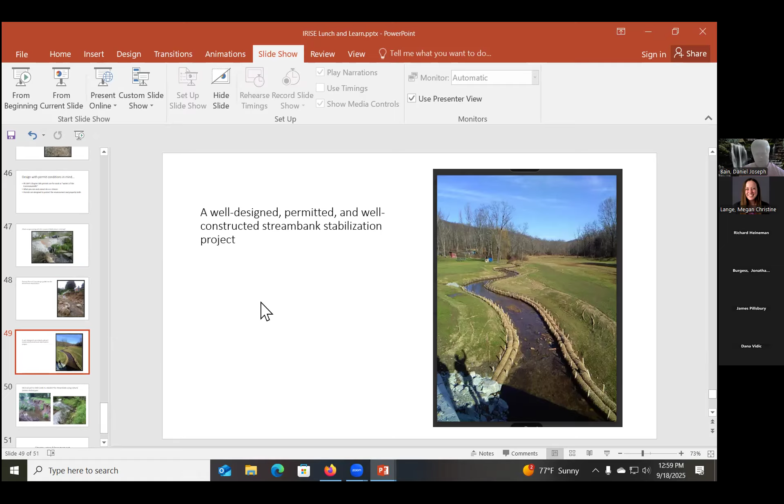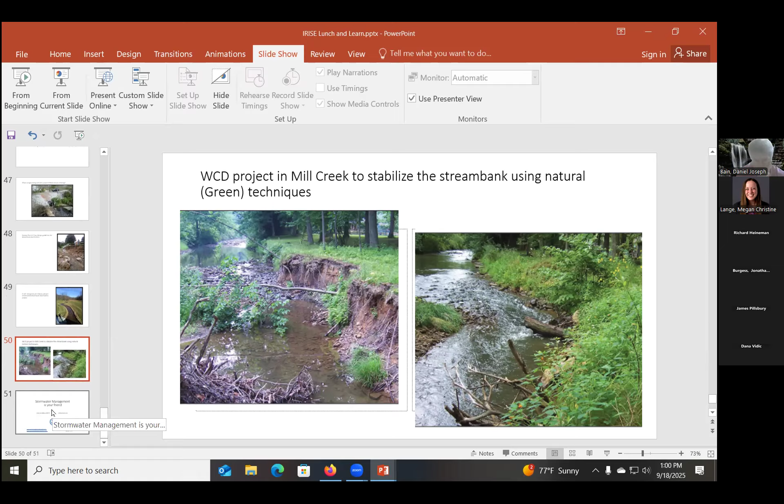Now, in case you're thinking that rock riprap is good, here's a project we did in Ligonier, and we stabilized a stream bank using natural techniques. Now, if you let nature do its work, nature will maintain a project for you. And so you see this situation on the right here. We used root wads, we used deflectors, we used vanes, we used natural plantings, and that photo there shows what that stream looks like, and its vegetation that was properly selected for that site is doing the maintenance for you. And so that's something that we have found over the years: you let nature do some of your maintenance for you.